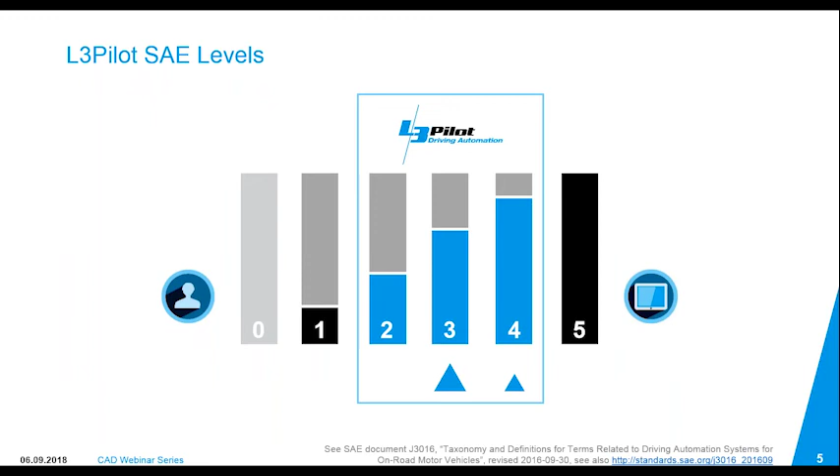Now, in L3Pilot, we focus, as the name says, on SAE level 3, but we will also assess some level 4 functions. To give you a short impression about how big L3Pilot is and what efforts need to be done to realize a pilot in Europe, here are some facts about the project. We have a budget of 68 million euros, 36 million euros of it funded by the European Commission. It will take us altogether 4 years to realize the pilot, and there are 34 partners from altogether 12 countries involved in the project.

We made sure that we have the relevant stakeholder groups integrated as partners. We have a user group, we have authority, we have insurers, and we have all major European OEMs included in the project, the suppliers and the leading researchers. SMEs are supporting us with special services.

Now, in the end, let me also give you a brief overview about what we do exactly, how it breaks down to the work in L3Pilot. In the beginning, you need to prepare a pilot. And this is what we are talking about today. We develop a methodology. We also build up a fleet. Then when it comes to the real driving, you need to have tools to deal with the data you are receiving from the tests. And also, you need to organize the piloting itself. Then, once we have conducted the tests, the driving results need to be evaluated.

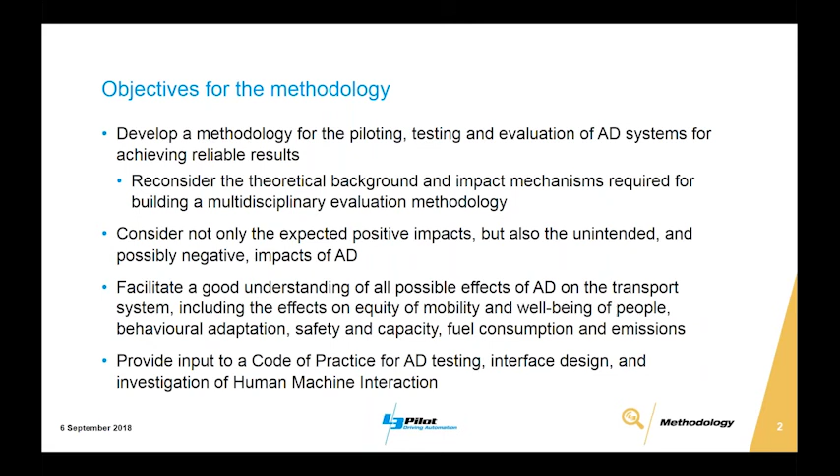So it's a little bit slow to change the slides. Yeah, now.

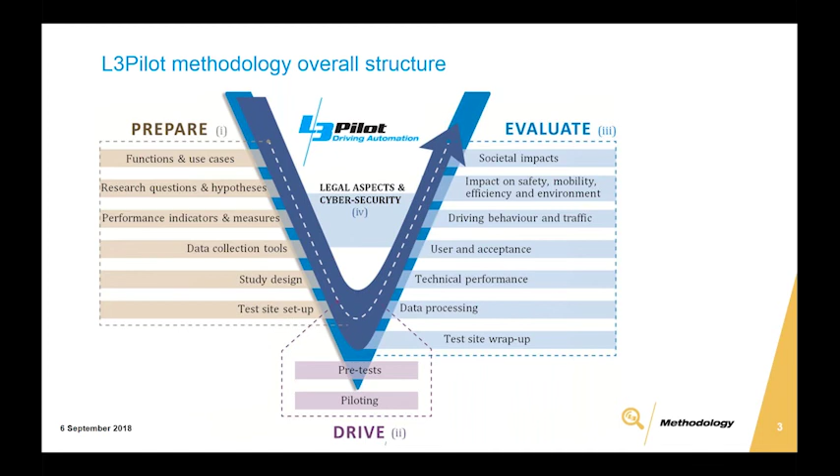Okay, so first of all, the overall objectives of the methodology part of L3Pilot. The overall objective is to develop a solid and multidisciplinary methodology for L3Pilot to achieve reliable results in the evaluation in L3Pilot level. And how to achieve that? We need to, of course, start with the state of the art and the theoretical background, and then to cover both the direct and indirect, and also the positive and potential negative effects of AD functions. And at the end, we also provide the input for the code of practice, which is now going to be updated from the code of practice for driver support systems to the code of practice for automated driving.

So the methodology part of L3Pilot covers the FESTA V, the left side, so the prepare part, and then the piloting covers the lowest part, the drive, and then of course the evaluation is the right-hand side part. But we do have very close cooperation with different sub-projects and different work packages in the project to make sure that we are not only planning something theoretically, but we are also taking into account what is possible and then trying to fit the hopes and the offerings from the OEM side together to get the L3Pilot level results at the end in the evaluation.

In all, the methodology part is divided into 3 consecutive steps. And basically the first step is so far done. So we started from theories and mechanisms, impact mechanisms, and also the function descriptions as we see them at the moment. From them, we made together the research questions, also the hypotheses, and then from the hypotheses, of course, we can also create the logging needs that are now going to be implemented into the logging systems by another sub-project.

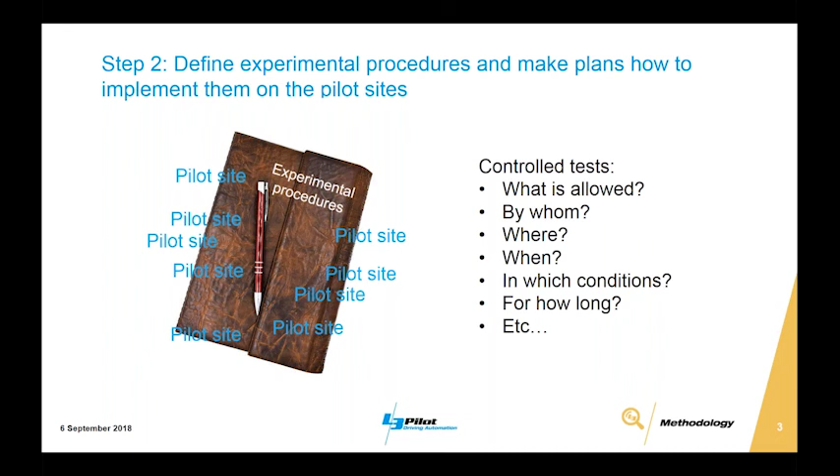And as the first step, we have created the overall testing plan. And then the second step will be walking through all the pilot sites and then fitting the overall plan to the pilot site level. So that's the work still ongoing. The overall plan is more or less described. So as in Satu's slides, this was step 2 in the methodology creation.

And what belongs to these experimental procedures? So basically, it is more or less getting the solutions to how to collect the data, from whom we should collect the data, when and where to collect the data, and in which kind of circumstances, which kind of weather, and so on. And then at the end, when we have collected the data, then comes the scaling up, and then also the input for the code of practice, which of course the actual scaling up will then happen in SP7 when the results from the pilot sites are ready and when we have the additional data sources to be used. But the methodology is selected and described in SP3.

Overall, of course, as many of you know, there is a very wide variety of different approaches that could be used when collecting the data from the pilot sites and from the pilot tests. And they vary from, let's say, driving simulator to naturalistic driving studies, and in what we are selecting, we need to find the balance and make sure that overall we get data that is enough for SP7, or the evaluation part, to make the evaluation.

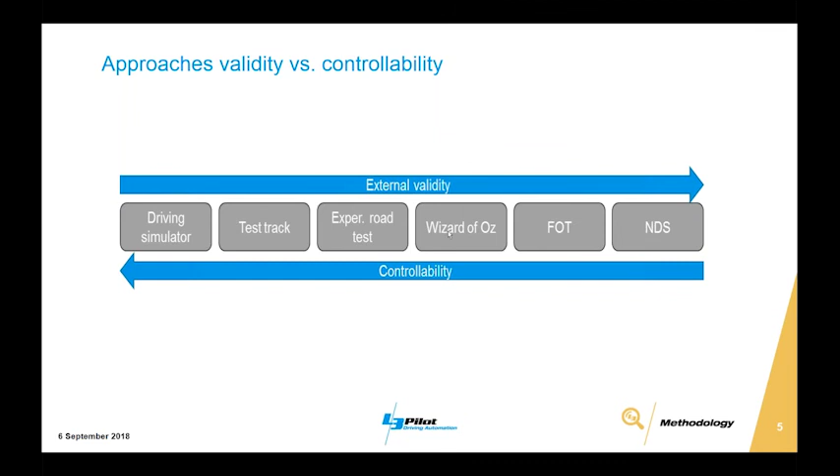We know that the external validity is increasing when we go in the picture towards the right, so towards the naturalistic driving study. But then on the other hand, we cannot control things very much when we are in the naturalistic driving study, but in the driving simulators and test track, we can control much more which kind of situations we take the driver into, and what are the details of the functions of the AD there. But that's again something we need to be aware of, and we need to plan ahead, because we will basically utilize all these different approaches in different test sites during the L3Pilot data collection.

So the second step, from whom to collect the data. Of course, when we want to have a representative sample, then we should basically pick people for the tests that are representative of the general public. However, we also know that at the moment we are not in a field operational test, we are actually in a pilot project. That also means that some of the OEMs still have the functions under development, so they are still at the prototype level. So in that sense, again, we need to find the balance between what is feasible and what is needed to make the assumptions towards the general public.

So we try to get as much variation of backgrounds as possible, and also try to include subjects that are not aware of the systems too much beforehand. Of course, they need to be instructed how to use the system, what the limits of the system are, and so on. But especially in the pre-piloting period, the tests will be started with very experienced drivers to make sure that we are on the safe side all the time. Of course, other things we'll be taking into account are the driving experience of the drivers, and when it comes to willingness to pay, willingness to use and possible mobility impacts and so on, then we need to use more or less the general public as subjects.

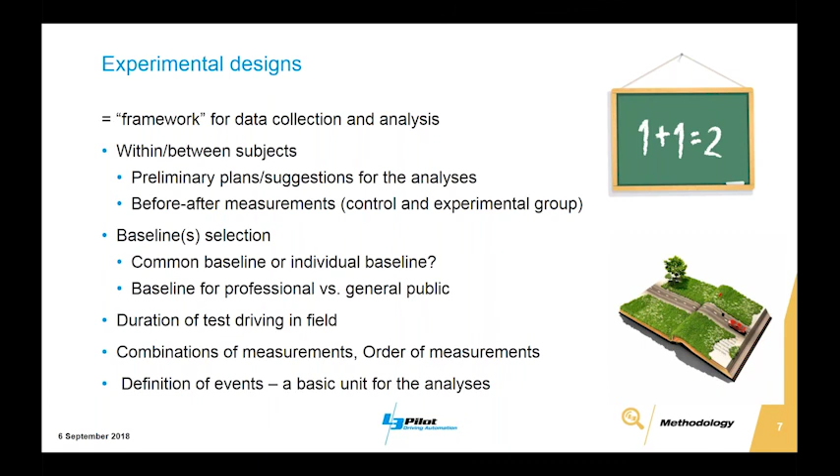But then luckily we also have test sites that have the possibility to collect more naturalistic data, or repeat the data collection many times, meaning that even if the number of drivers may not be very huge at one point, we get a lot of data and a lot of events from which we can then make the evaluations. And of course, it's important to also define what kind of measurements we are using, what the order of the measurements is, and then the definition of events. So what are we comparing in automated driving?

The experimental environment, so the test environment, is very important as well. So for instance, in which kind of weather we are collecting the information or the kind of impacts. Some pilot sites are at least starting during the daytime and during good weather conditions, but we also include some of the data collection in rain and in somewhat reduced visibility. So that has already been promised that it will be possible.

We are very carefully taking into account the geographical location, also the road type, so how many lanes and how many carriageways it has. Also the traffic conditions, so what is the traffic density, for instance, or traffic flow, and then also if there are only vehicles around, or, as in urban areas, other road users as well.

And this all is linked to the scaling up principles, because basically when we want to know the impacts at European level, then we need to know how representative our experimental environments have been compared to European level driving.

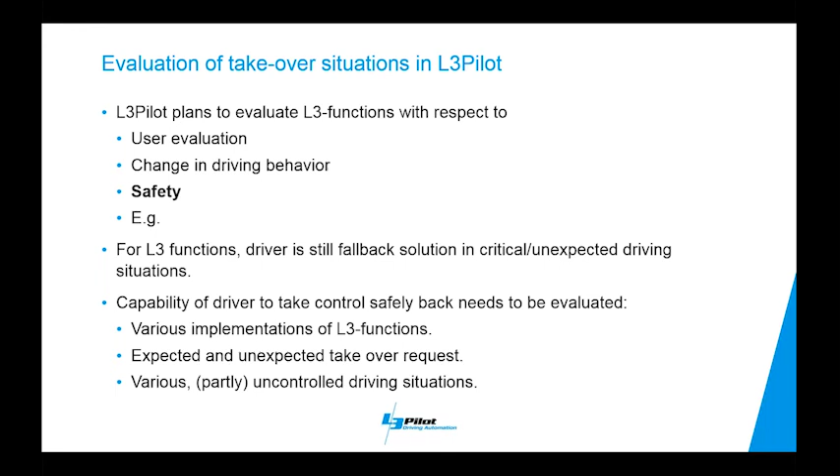So it will not only be one or the same function that is tested, but there will be motorway pilots from various OEMs with various setups and also various designs of the takeover requests. Then it will be testing in real traffic. So this means there will be expected and unexpected takeover requests.

That means at the end of the functionality, so before an exit, but also probably unexpected ones in case, for instance, there are no more lane markings available. And since this is real traffic, these situations will not be controlled. They will vary between instances. And this all makes this evaluation of the takeover situations quite complex.

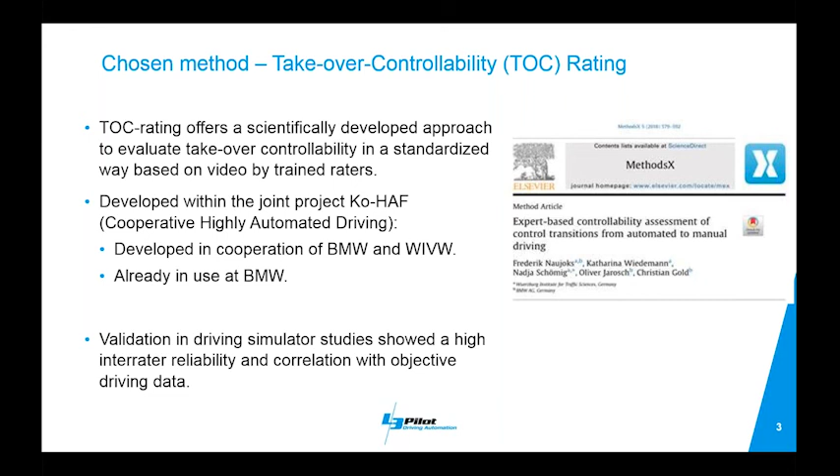We decided to use a method that was developed in another project that's called the Takeover Controllability Rating, TOC rating. This is a video-based approach to evaluate the takeover situations. It was developed in a German research project called Ko-HAF that deals with cooperative, highly automated driving. It was developed in that project in a cooperation of BMW and us.

And in that project, but also in other studies, we validated that method, but up to now mostly in driving simulator studies. And we could show that there's a high inter-rater reliability if you use that method. And we can also find correlations with objective driving data. So all in all, it seems that the approach is quite valuable to evaluate takeover situations.

So how does this method work? First, it is important to know that the driving situation is evaluated as a whole. So you look at the driving situations, you look at the behavior of the system, you look at the reaction of the driver, and you also look at the impact of the driving situation itself. That means maybe impact of the infrastructure, impact of other participants driving next to the driver, etc.

And what you then do is that you take this video sequence with the takeover situations and you watch this video several times. And then you have a defined hierarchical process on how to come to a final decision about the controllability of these situations. So first you look at it and decide if it was controllable, yes or no. That means if there was an accident, if the driver left the road, something like that. So some really severe event in that situation.

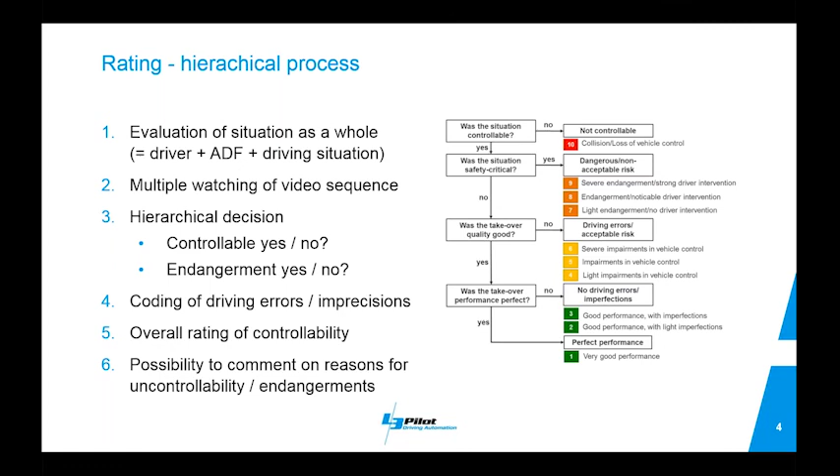If you say yes, it was controllable, there was no accident, then you decide if there was some critical situation, if there was some endangerment, either to the own vehicle or to some other vehicle. And if again you say, okay, there was no endangerment, then in the next step you code driving errors or imprecisions on defined dimensions. And based on that, you come to an overall rating of the controllability.

Furthermore, the idea of the rating is that in the end you have one value that gives you a rating for this one specific situation, but you also have the possibility to have comments or to mark down reasons for certain events, so that if you look at it in more detail, for instance, to adapt your takeover requests, you have the possibility to do so.

So here you see what this overall rating in the end looks like. You have a rating on a scale between 1 and 10. 1 is perfect. 10 is in case of an accident or an uncontrollable event. And in between, there are different levels or categories. You can have good driving or solution of the situation, but with some imperfections in driving. You can have reduced performance or driving errors, or you can have endangerment or critical situations.

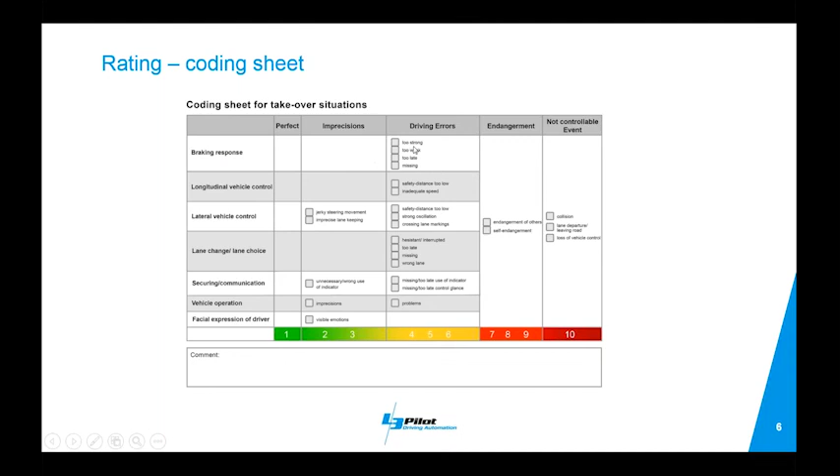This is done with the help of a defined and pre-developed coding sheet. So here you can see on the bottom the scale that gives you in the end the final rating. And here you can just cross what you can see in this situation, if there was some collision or lane departure, or here, for instance, on the dimension of braking responses, if the driver missed braking or braked too late, things like that. So there are predefined dimensions, also predefined categories that are already linked to a certain rating on the scale.

Okay, now if you decide to use that takeover controllability rating in your study, what do you have to do?

First, for sure, you need to select the video sequences with the takeover situations. In L3Pilot, the idea is to do that based on vehicle data, because we plan to log in the objective driving data every takeover request, and then we can use that to select the takeover situations.

Then if you have multiple scenarios, you have to define more or less comparable start and end points. That is easy in a driving simulator study. It is more complex in data collected in real traffic, but the points should be chosen in a way that you are sure that you can see the development of the situations before the takeover request, and that you can also have a chance to evaluate how the driver gets back into the driving task after the control is handed back.

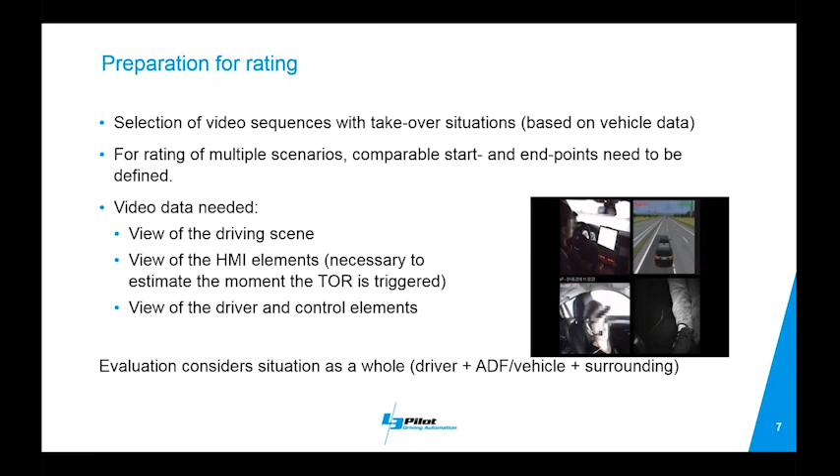You need for the rating video data. For sure you need a video of the driving scene. In real traffic videos, that means a view of the scene in front of the vehicle, and also a view of the scene on the back of the vehicle, to evaluate if, for instance, the driver got too close to the vehicle behind. Then you need, in case you do not have the information from objective data, a view of the HMI elements to see what the function does. And you need a view of the driver's face and how he reacts.

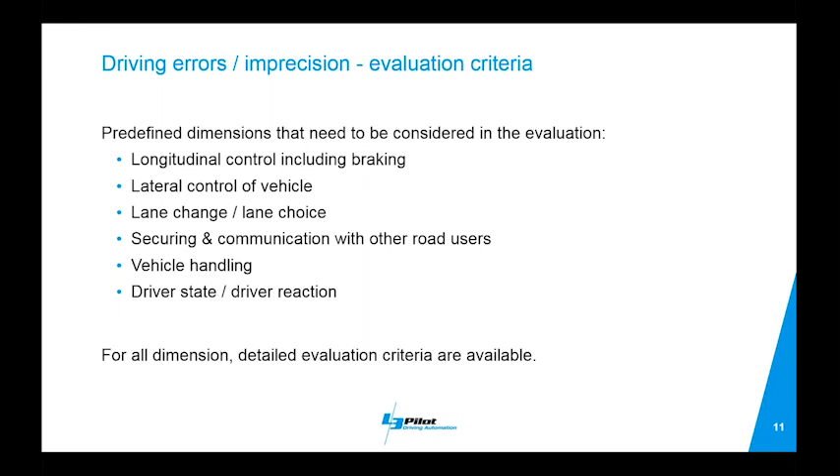It looks at the vehicle handling, if that is somehow hectic, or if the driver looks not so sure of himself. And it also looks at the driver state and the driver reaction. And for all those dimensions, there are already predefined detailed evaluation criteria available that can be used.

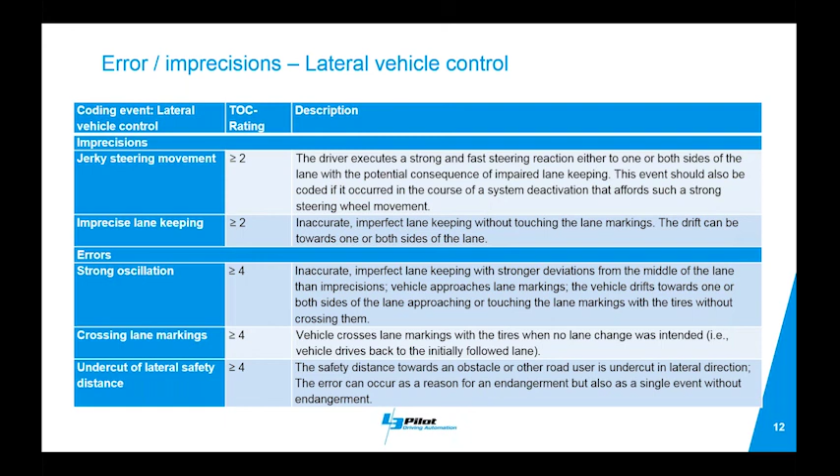So here's one example for the lateral vehicle control, where you can have, for instance, imprecisions. This might be imprecise lane keeping or jerky steering, a bit hectic. If this gets stronger, we are talking about errors in driving. This can be strong oscillations in the lane. It can also be that the driver leaves his own lane, crosses the lane marking, or gets very close to other objects or other vehicles on the side.

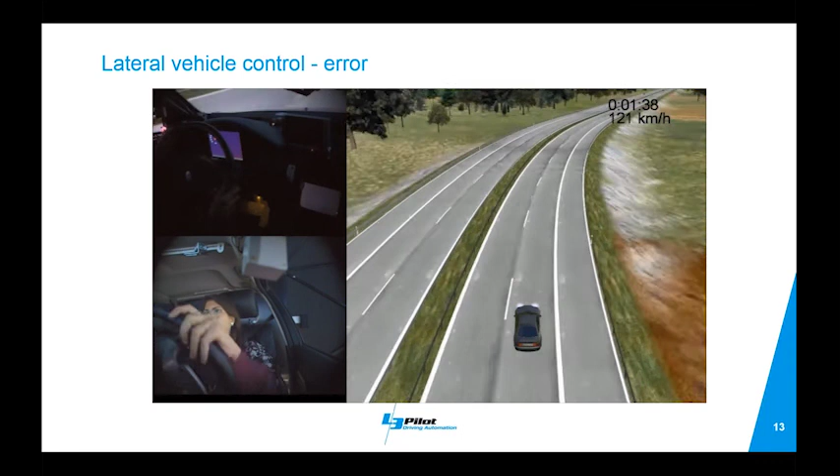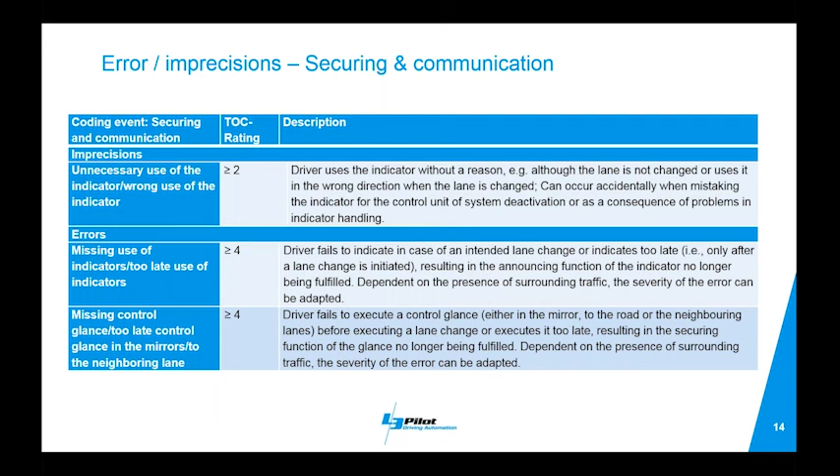And here, one last example for those categories. That's the dimension of securing and communication. There can be imprecisions in that category. That is the unnecessary use of an indicator or use of the wrong indicator, or maybe switching between left and right indicator in a situation. There can also be errors. That's the missing use of an indicator, or that it's used very, very late. But it's also a missing securing of other vehicles. That means no control glances to the mirrors or to the side, etc.

So I hope after these examples, it's now a bit more clear to you all how we plan to evaluate these takeover situations in L3Pilot. As you've seen, a lot of things are already available, which makes this method quite useful for L3Pilot, because we do not have to develop it. We already have a standardized coding protocol. We can rely on a defined process on how to come to the overall rating.

We already detailed criteria for the evaluation, and there's lots of training material, including the videos, so that also potential raters can get a feeling on how to use the categories. Now, a short outlook of what is planned in L3Pilot.